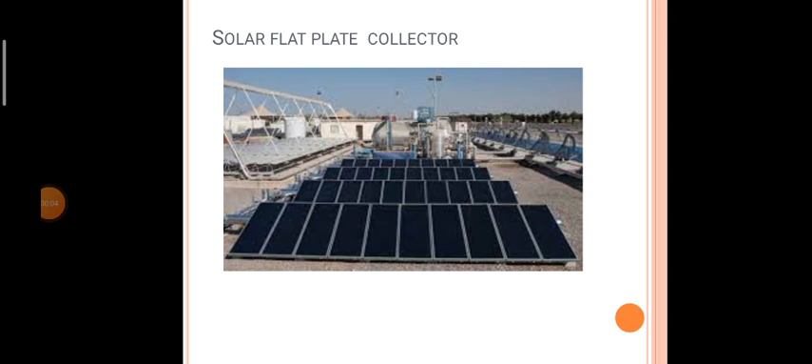Solar flat plate collectors. As we have already discussed about the main components of solar flat plate collector, it consists of transparent cover, absorber plate, tubes, insulated box. We have also discussed in detail regarding the limitations, requirements and the efficiency part of transparent covers and absorber plates. We will continue the discussion from tubes.

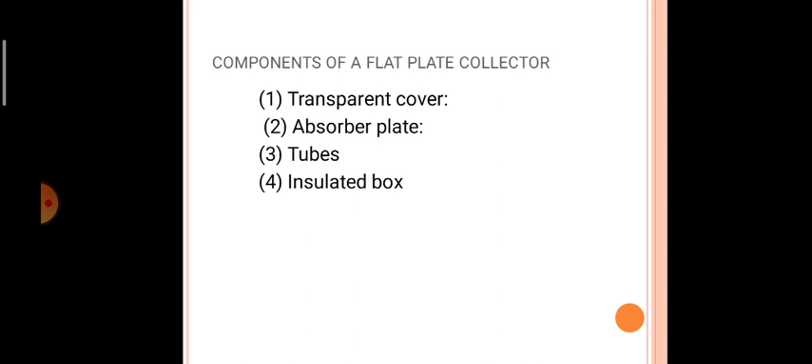Tubes are the main source of passage of fluids that have to be heated to higher temperatures using the solar flat plate collectors. These tubes are placed behind the absorber plate in series such that the liquid or the fluid passes through them. The tubes are also made of metals like copper or aluminum, whose diameter is around 1 to 1.5 centimeters.

All the tubes are in turn connected to a header pipe at bottom and top, which supplies the water into the tubes and collects it back from the other end. As the water flows from bottom, the water that is heated to a higher temperature is collected in the storage tank at the top. The header pipe is also made of the same material, but it has a larger diameter compared to the other tubes.

These days, even plastic tubes of low thermal conductivity and a higher coefficient of expansion are also used, because metal tubes are prone to corrosion with saline liquids, whereas plastic will not have such a problem. Steel tubes with inhibitors can also be used in order to overcome this problem.

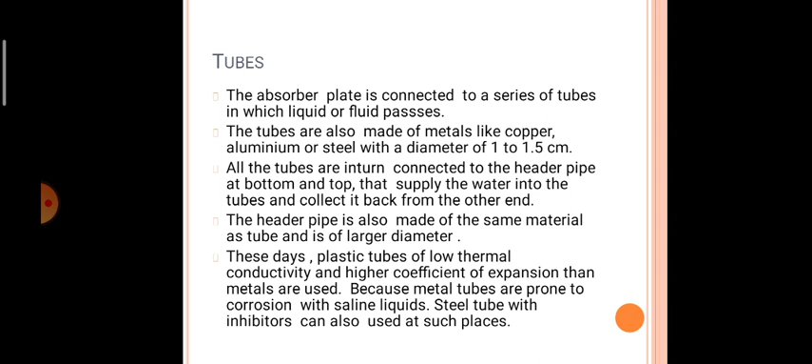Next comes the insulated box. All the three components, namely transparent cover, absorber plate and tubes, are enclosed in a rectangular box made of galvanized iron sheet. It is insulated on all sides and bottom using glass or mineral wool of thickness 5 to 8 centimeters, thus reducing losses from conduction even at back and side walls.

The box is tilted to south and the tilt angle depends on the latitude of location, that is, the place where we are going to arrange this solar flat plate collector will decide the tilt angle. The face area of the collector box is between 1 to 2 square meters, such that the solar direct and indirect radiation falls onto the solar flat plate collector, thus giving us maximum amount of solar radiation converting into thermal energy.

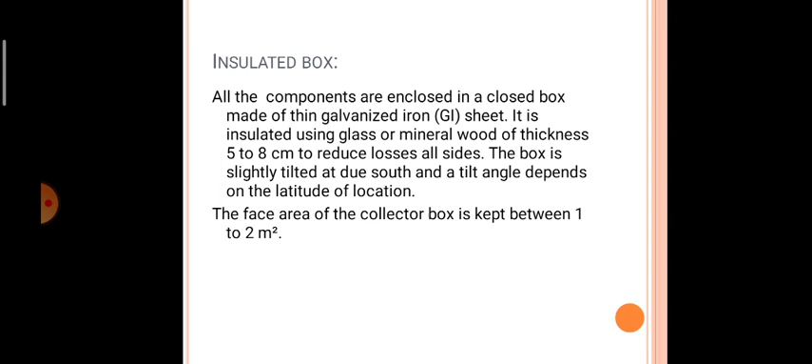Working mechanism. The sun's shortwave radiations pass through the transparent cover, enter the collector, thus heating the fluid. The absorber plates transfer the heat to the fluid. The hot fluid then moves from the collector to the storage, that is at the upper top of the solar flat plate collector. As the liquid circulates through the tubes, it absorbs the heat and gets heated.

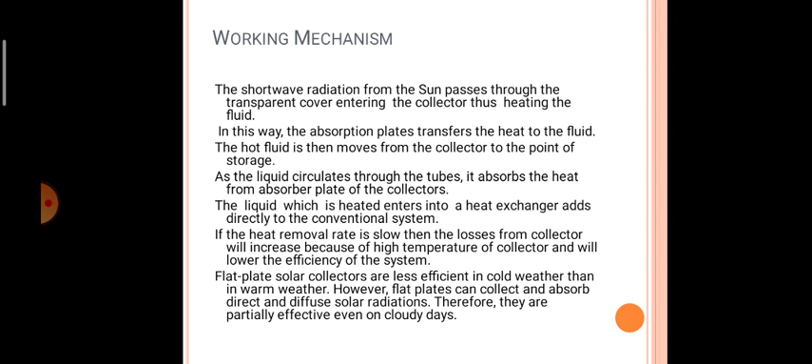If the heat removal rate is low, then the losses from the collector will increase because of high temperature of the collector, thus resulting in low efficiency of the system. Solar flat plate collectors are less efficient in cold weather than in warm weather. However, these flat plates can also collect direct and diffuse solar radiations, thus giving us hot water even on cloudy days.

The collecting efficiency of a flat plate collector will always be around 40 to 60% for a temperature rise of about 15°C and then drops down to 30% if the temperature further increases. The absorbing efficiency of a flat plate collector increases by applying a selective coating to the collector surface instead of black paint. The efficiency can also be improved by coating the glass plate with anti-reflecting coating on the cover.

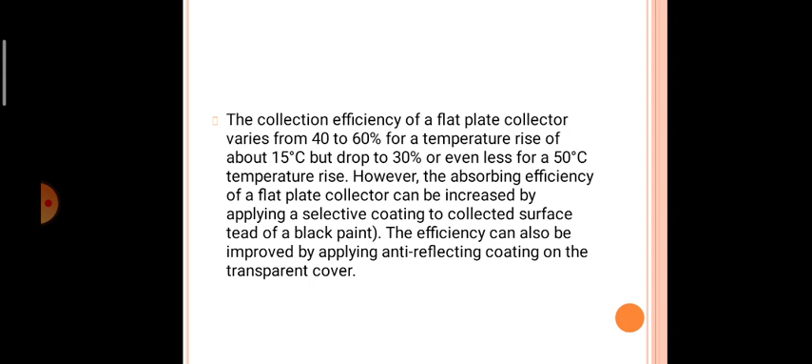The advantages of flat plate collector are: it utilizes both beam as well as diffuse radiation for heating. It requires less maintenance. It doesn't require a tracking device as per the orientation of the sun, thus its cost comes to a very low value. It can be mechanically simpler in construction as compared to focusing collectors.

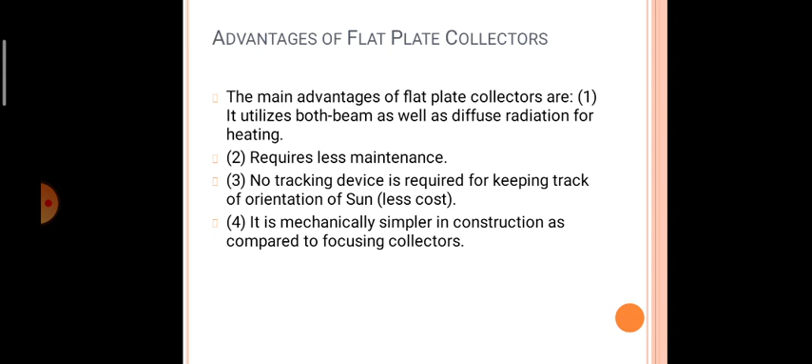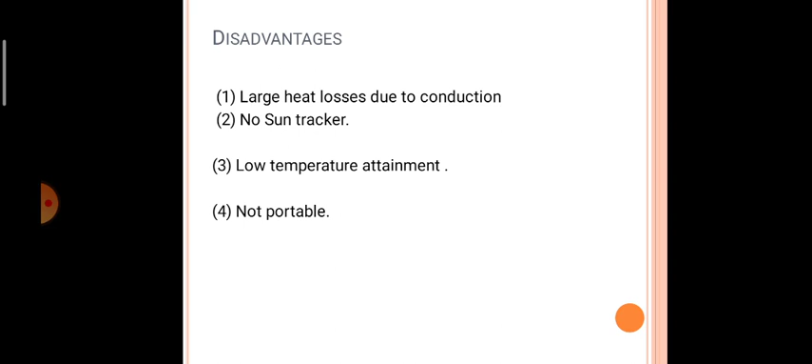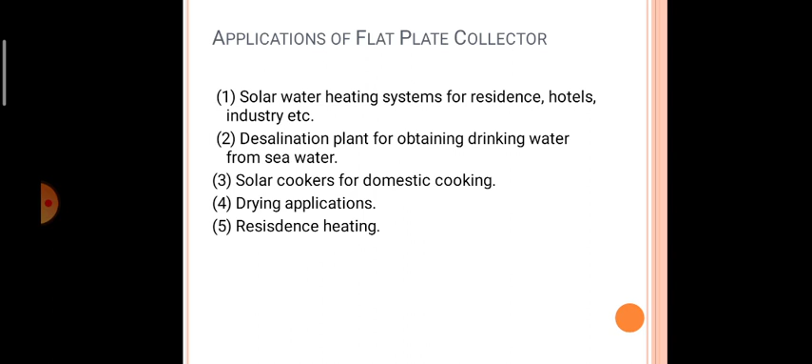Solar water heaters are very common nowadays and have a wide growing market globally, where there is no extra requirement of external energy source. Solar cookers are another application where solar energy can be directly used for cooking purposes. These solar cookers also vary depending upon their design and size.

Solar flat plate collectors are also used for residence heating in cold countries, where these flat plate collectors are arranged on the roof of the houses, thus providing hot air using an exhaust fan connection into the homes, where the liquid that is flowing through the solar water heater tubes, as we have already discussed, is replaced with air. This air, once heated, is connected in such a way that heated air passes into the houses, thus heating the residence also.

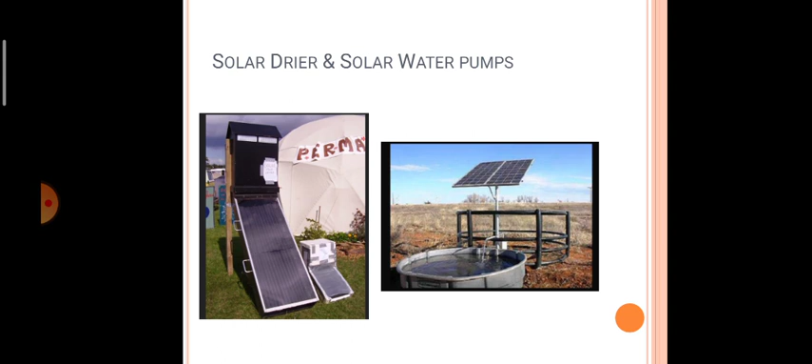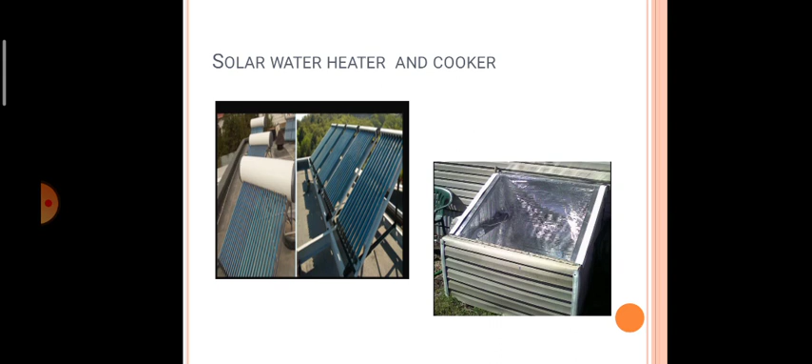Thus, solar flat plate collectors can be used for household appliances, or in large scale for industrial and commercial appliances, where there is no requirement of other alternative energy sources as long as the sun shines in the sky. So this is all about our solar flat plate collector.